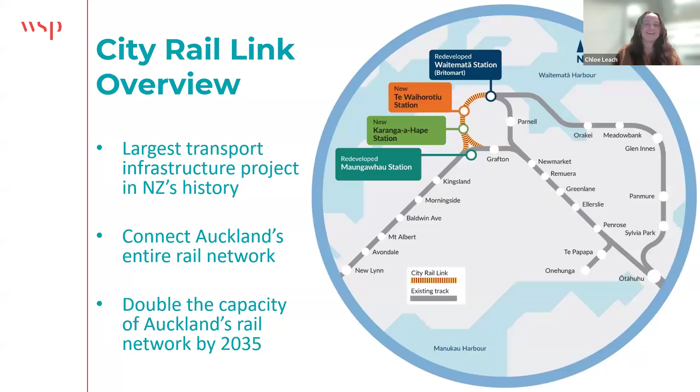Here we have a map of Auckland City where the project is currently taking place. Hey, Chloe. Sorry, do you mind sharing your screen? Oh, is it not sharing? Oh. Is that working? There we go. Thank you. Oh, sorry, guys. My Zoom's been playing up today. So I'll just start this again.

Here we have a map of Auckland City where the project is currently taking place. From Te Waihorotiu Station to Maungawhau Station along the yellow and orange line is the route which the twin tunnels take. In order to construct this, a tunnel boring machine was used. It first travelled from Maungawhau through Karanga-a-Hape and down to Te Waihorotiu, completing its first trip at the end of 2021, before being dismantled and rebuilt to complete the trip again with the final breakthrough at Te Waihorotiu in September of 2022. The tunnel boring machine worked by slowly drilling to excavate and remove the soil in its course before placing segmented concrete rings to line the tunnel as it propelled itself forward.

During my time with the Link Alliance, I worked on Te Waihorotiu Station. Te Waihorotiu is a new 20-metre deep and 370-metre long underground station in Auckland's Midtown. And when CRL is open for public use, it will be Auckland's busiest station due to its central city location. The station will have entrances on Victoria Street and Wellesley Street, providing easy access to key Auckland hotspots like the Sky Tower, Civic Theatre, and Aotea Square. Te Waihorotiu has also been future-proofed for the potential development of a northern line beneath the station.

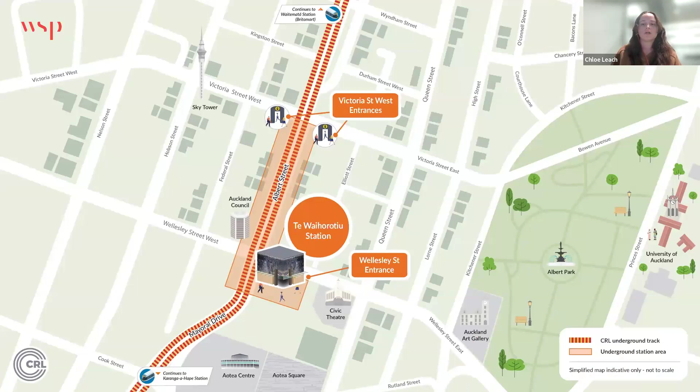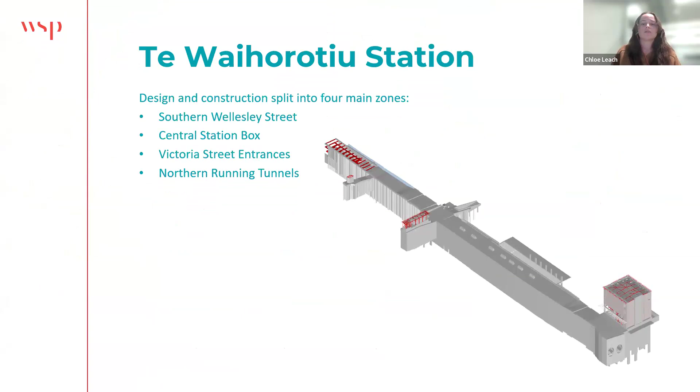The structure is a 4-story reinforced concrete, 2-way moment frame over a 3-story basement substructure. The superstructure has been designed with the capacity to support a future 24-story over-site development building. So we've got some pretty big columns.

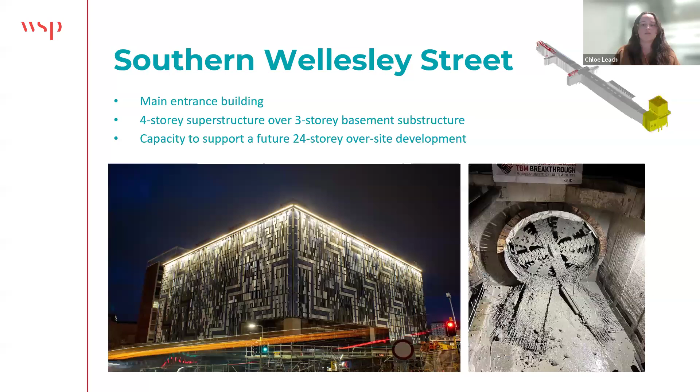Then going down to the substructure of the Southern Wellesley Street zone, this is where the entrance connects to the bored twin tunnels, which link Te Waihorotiu up to Karanga-a-Hape Station. And you can see in the picture on screen the moment the TBM made its final breakthrough into Wellesley Street.

The structure of the central station box comprises of reinforced concrete diaphragm walls that support suspended floor and roof slabs. The station box has 2 floors. The lowest B4 level will contain the train services and platform, and the upper B1 level is the main concourse for the flow of passengers between the entrances.

The construction methodology for the main station box was top-down construction. This involves vertical excavation and installation of diaphragm walls into the soil before constructing and pouring the station box roof on top of the existing soil. The soil below the roof is then excavated out underneath until the required level of the next lowest slab is reached. The slab is then poured and the process continues.

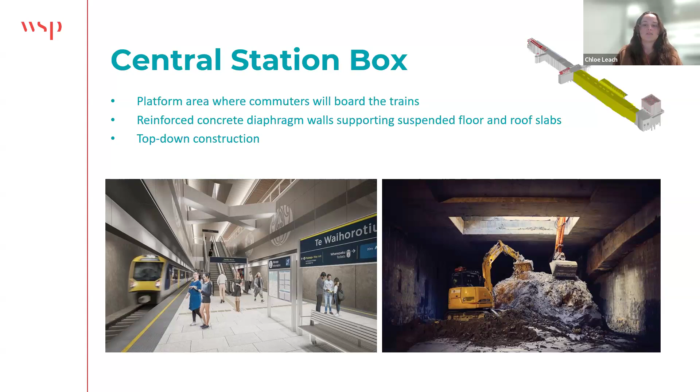And you can see in the photo to the right, the last bit of soil being lifted out of a construction void in the roof before the B1 slab was poured.

Moving further north, we have the Victoria Street zone. This is where we have the second set of entrances to the station, one to the east and one to the west. These will be the main pedestrian access points to the station and will lead passengers to the platform via the central zone's concourse level.

Essentially, the plunge columns are hollow steel columns with shear studs on the exterior, which are driven into the ground at the same time the diaphragm walls are installed. They're filled with concrete during the roof construction and excavated around. After the soil is removed, the concrete cages are placed around the column and an exterior is poured.

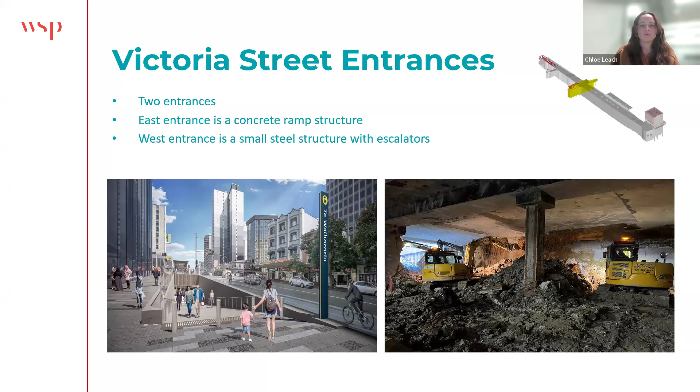Finally, the last zone is the northern running tunnels, which connect Te Waihorotiu Station to the previously completed cut and cover tunnels running beneath Lower Albert Street and down to Waitemata Station. This section of the station was constructed using a different construction methodology known as cut and cover. And this was due to the really tight constraints in this area, meaning that the plant used to excavate for the diaphragm walls couldn't physically fit.

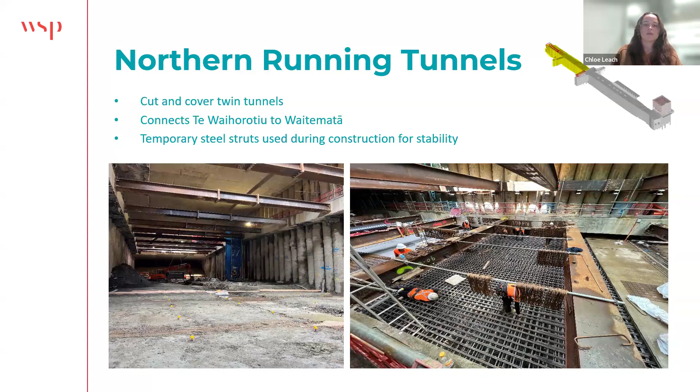Working in the CPS team at Te Waihorotiu Station provided me with first-hand experience in taking designs from plans to reality. Supporting the construction process on site gave me a practical understanding of how our projects are built. Since moving on from CRL and working on other types of structures, I consistently draw on my on-site experiences to make sure my designs are constructible.

The City Rail Link showcases innovative engineering and a collaborative effort reshaping our transport infrastructure and delivering massive value to Auckland. It was a wonderful experience to be part of the team bringing it to life, and I can't wait to see the positive impact it will have on our community. Thanks, everyone.

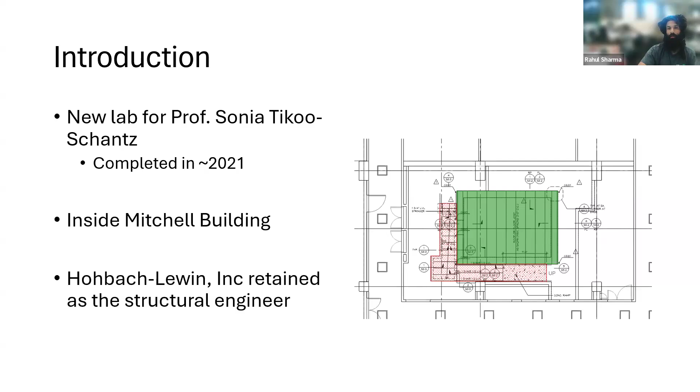So that led to a career in planetary geology and geophysics. And so why is it important to study the magnetic field of rocks? I'll start with the Earth. The Earth generates these magnetic fields through liquid metal flowing through its interior. And what it essentially does is it blocks harmful solar rays from interacting with the Earth's atmosphere and changing its chemical composition. So essentially, it's necessary for habitable life on Earth. Another fun fact is that you can use this magnetic field to understand the tectonic motion of the Earth's tectonic plates. I thought that would be interesting for this group because that relates to earthquakes.

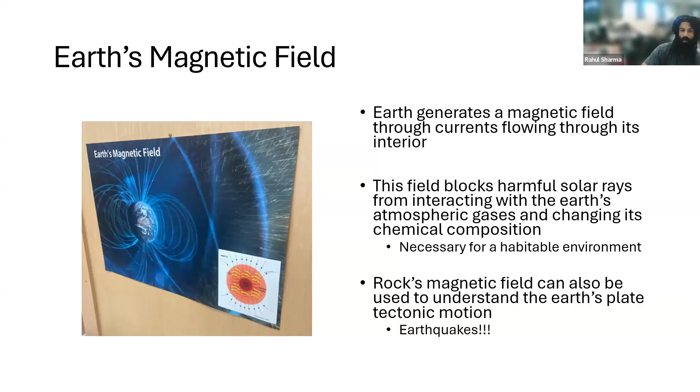Other planets such as Mars have lost their global magnetic field, so that's partly one of the reasons why they're uninhabitable. And it's interesting to understand how these habitable environments form because they generally take billions of years to form.

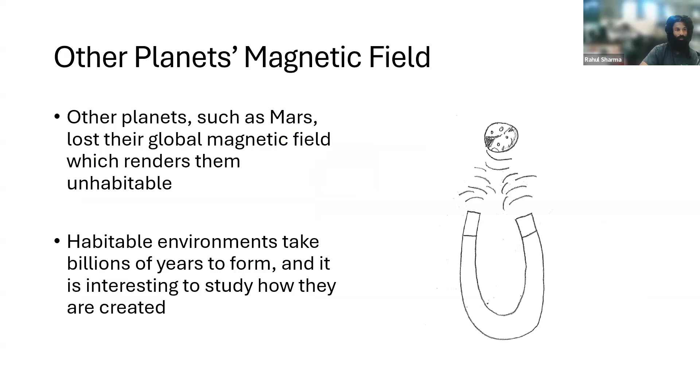This was done through embedding several layers of thin metal sheets into the lab's wall and roof, and then demagnetizing them. There are other labs like this constructed at Harvard and Rutgers, but those are both East Coast schools, and so they didn't have the same seismic criteria. That was one of the challenges - essentially justifying the lateral force resisting system of this particular structure.

This was constructed by this contractor, Lodestar Magnetics. That's who we were working with. They were great to work with. And as far as I know, they're the only ones that construct this type of lab.

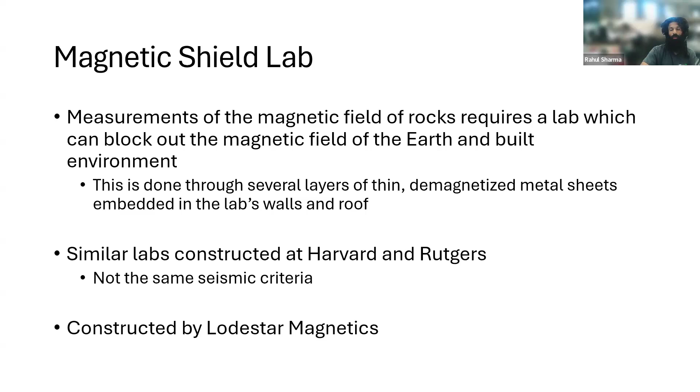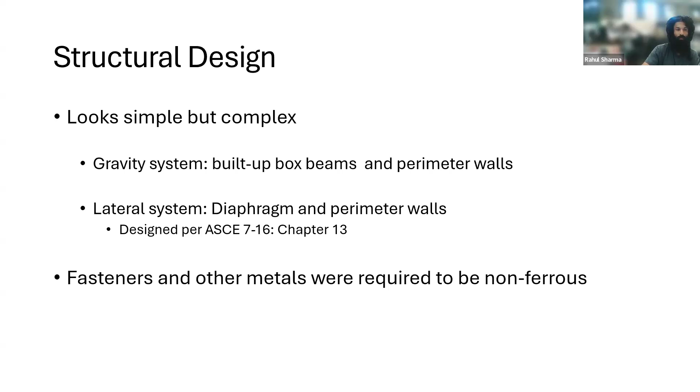Going into the structural design, it looks simple, like a box, but it was actually quite complex. The gravity system consisted of built-up box beams and perimeter atypical walls. The lateral system was wood diaphragms and perimeter walls, designed per ASCE 7, Chapter 13. One interesting and unique fact about this lab was that all the metals and fasteners had to be non-ferrous because we couldn't have anything interfering with the lab's ability to block out the magnetic field of the built environment.

For the non-ferrous fasteners, we had to specify either aluminum nails or stainless steel screws. For the rebar, which was necessary because they had to construct part of the ramp out of concrete, and they also dug into the slab and removed and replaced some of it, they had to use either solid round glass fiber reinforced polymer bars or stainless steel deformed bars. I didn't know those existed - I wouldn't have known without working on this project. So I put the ASTM requirements up there.

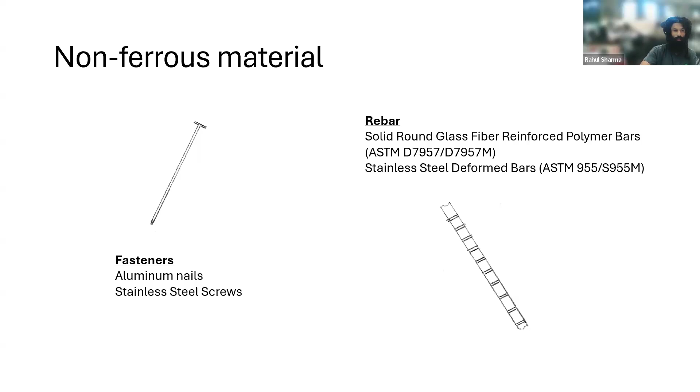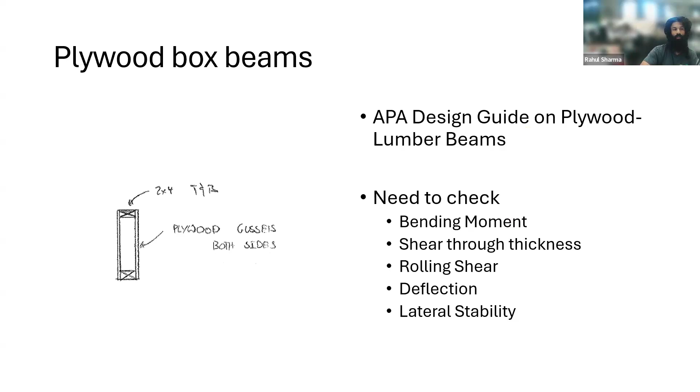As I mentioned, the gravity system consisted of plywood box beams. I also wouldn't have designed these if it wasn't for this type of project. Luckily, there's an APA design guide on how to design these kinds of members, and you have to check a number of different items. Going into the seismic design, I think for most of us who do seismic work, the first thing you have to do is determine the seismic weight.

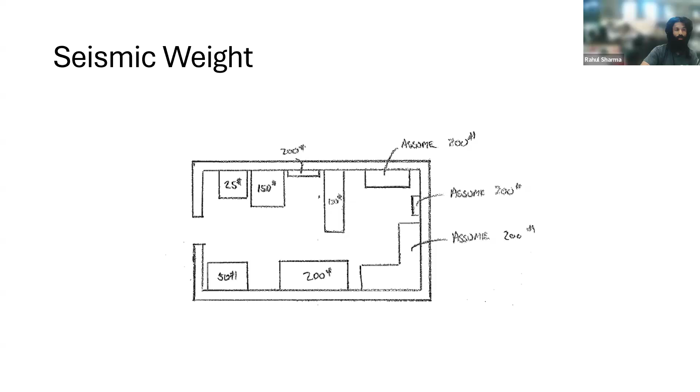We calculated the weight of the material and also the contents inside of it. I have an image here of some of the contents that were in the lab. It's a pretty small lab, but it's packed with quite a bit of stuff.

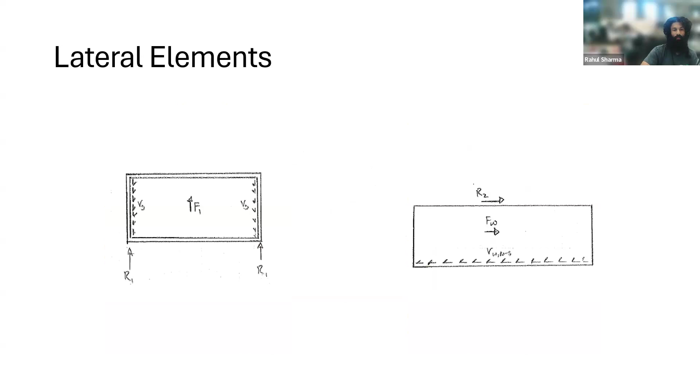Going into the lateral system, essentially following the load path from the diaphragm into the walls, it was important in terms of detailing. As I mentioned, most of the time this lab was constructed it was done in low seismic zones, so we had to ensure there was adequate lateral shear transfer.

Into the lateral elements. Also, because there were layers of metal embedded in the wall, there had to be a very intricate and unique screw pattern, as you can see on the detail on the right, in order to make sure everything was intact together.

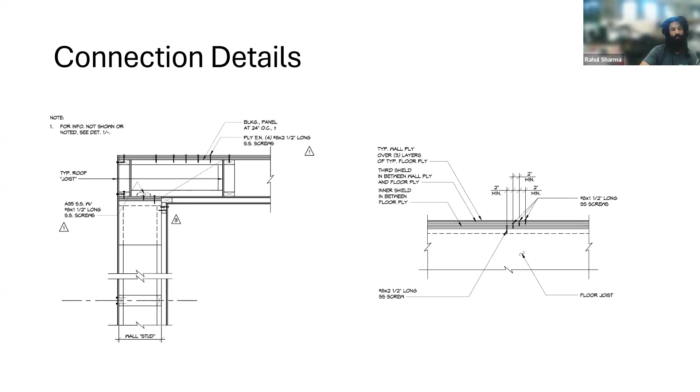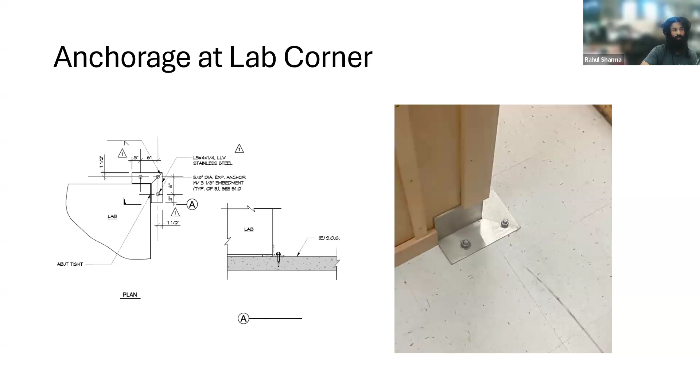That's my summary of the structural design of this structure. So maybe the next question you might ask is what's going on over there now? Professor Tico Sanchez has a student studying a lunar meteorite, a moon rock that broke off the moon and landed on Earth, and she's trying to understand how its impact history affects its magnetization.

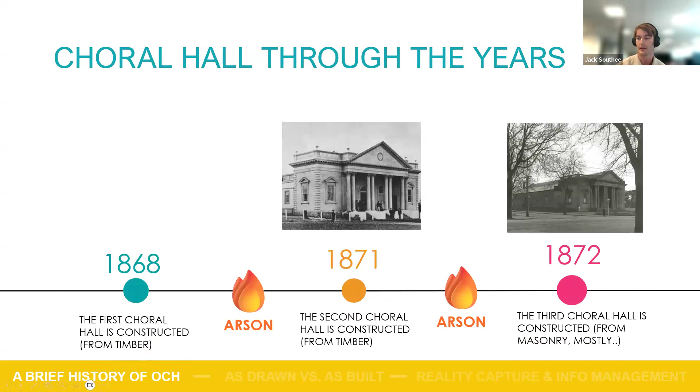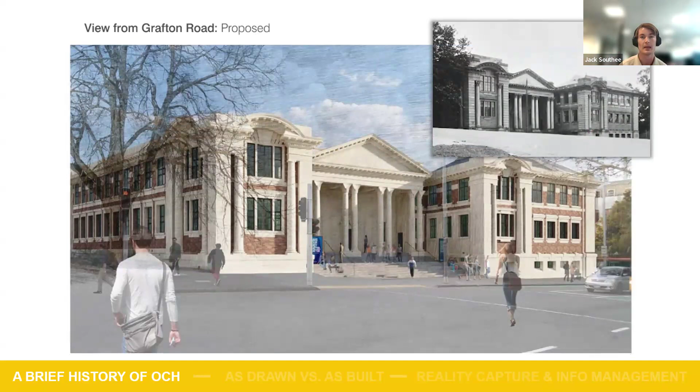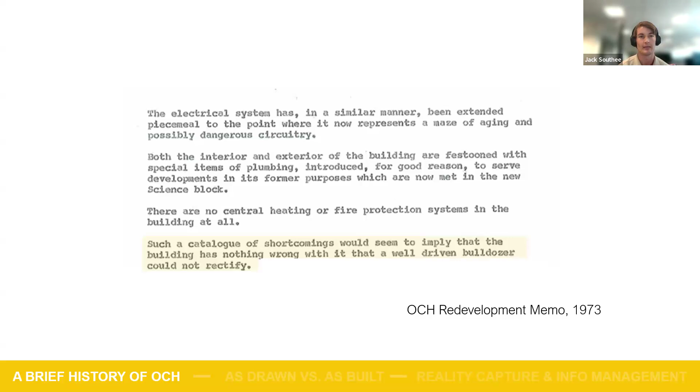So getting onto the dilemma of existing as-drawn and as-built, really what I'm talking about here is site validation. Without dumbing it down too much, when we're drawing an existing structure, we're concerned about where it is, what it is, and how intact it is. Finding out all those things takes time. During design, it's quite hard to get access to buildings - there might be operational restrictions because the building needs to be accessible, there might be asbestos, or there probably is asbestos. So there's only so much you can de-risk on the design side of things.

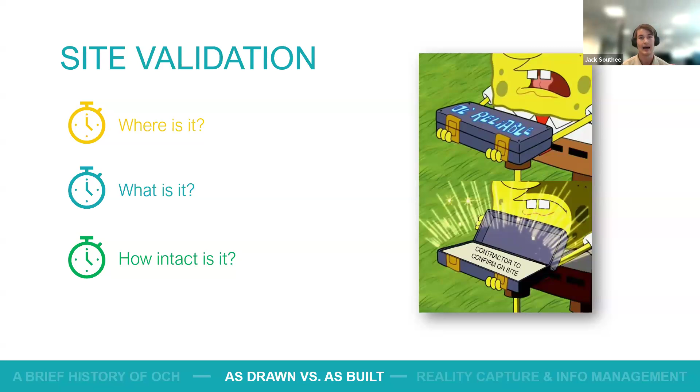So we end up with - and I'm not saying this is the silver bullet - but it is a contractor-to-confirm-on-site or design-team-to-confirm-on-site responsibility. To give an example: anyone who's worked on existing buildings will know that the foundations are always higher than you want them by a lot. As you can see here, we thought our brick foundations were quite a bit lower, but it turns out they're generally just put on the ground.

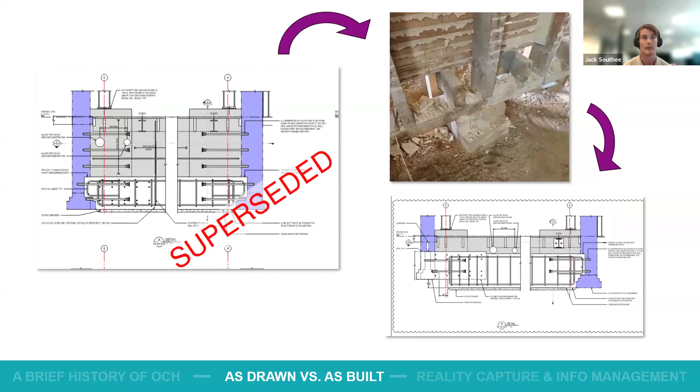So there's a fair amount of relitigation of design involved in that. Floors seem to have all sorts of things underneath them. In this case, once we demolished our existing concrete and timber floor, we found a well underneath it, which is not really something you have on your bingo card, but fortunately we're in the process of being able to celebrate that structure in a pretty cool way. So, blessing and a curse.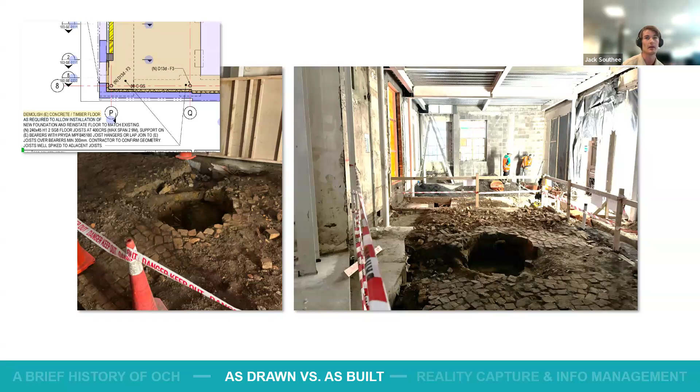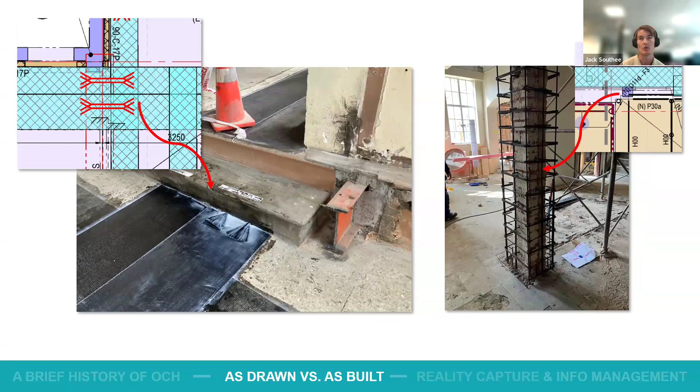But there's also smaller scale things. There's things like where we've got carbon fiber, so we're using a lot of FRP to strengthen our concrete diaphragms. We've then found that that's sometimes in the way of our strands or columns that are just smaller than we want them to be, things that are kind of bitsy and hard to track. This one I've also just thrown in there, another condition thing. Piles back in the 1870s were a little bit different to how we'd have them now.

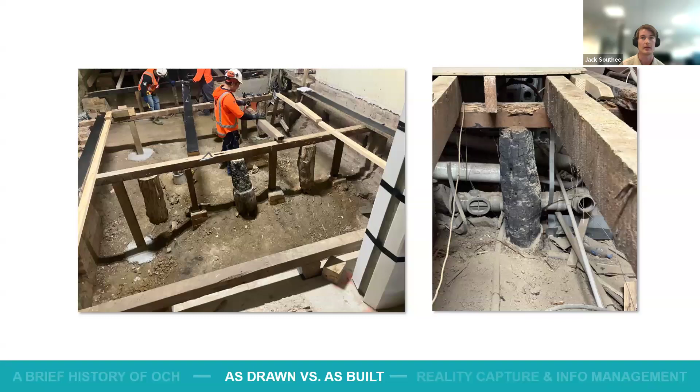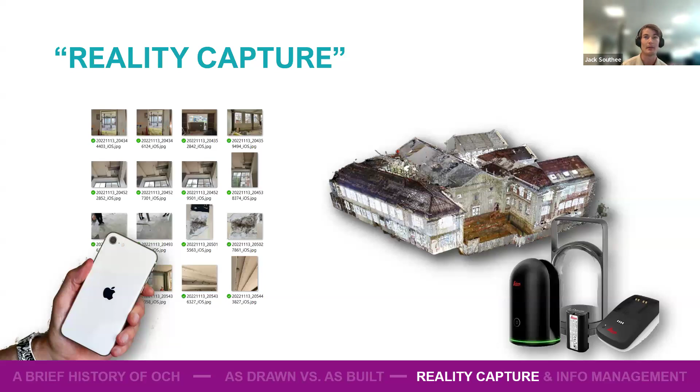So a lot of things that are all over the place, which is where I lead into this reality capture and information management piece. Reality capture, when we're talking about that, is anything from taking photos on your phone through to taking a big 3D model of a building, which is actually what we ended up doing in this instance. So it's not a typical one.

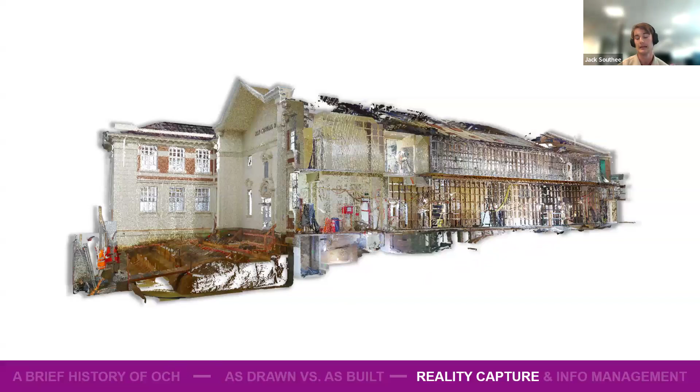Here's a section that was cut through. It's not a cadastral survey in the survey sense where you'd actually build off this. This was me walking around with a Leica BLK scanner, which we have access to here at Beca, doing my best to build a model. As you can see, just looking through this section, it immediately makes it a whole lot nicer to see where our levels are and what's sitting on top of the other. There's some other nice renders here showing what that looks like, and being able to digest the structure in a much more palatable format, which is cool.

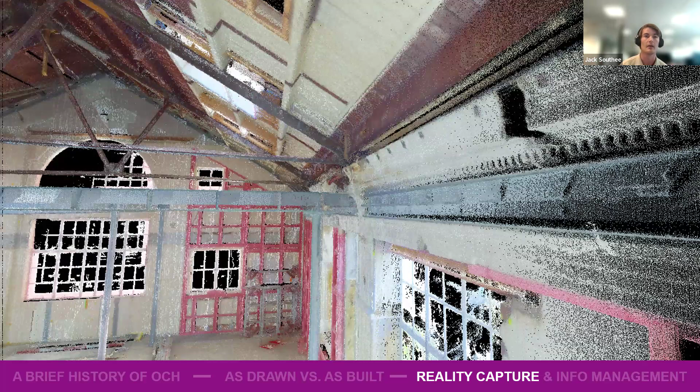The other thing is we can do successive scans. In this case, you're seeing this lovely bit of entablature, as it's called, which we didn't expect to be there on the side, which is always fun. So we ended up rearranging the steel work to be sympathetic towards that. It's cool to see how that progresses.

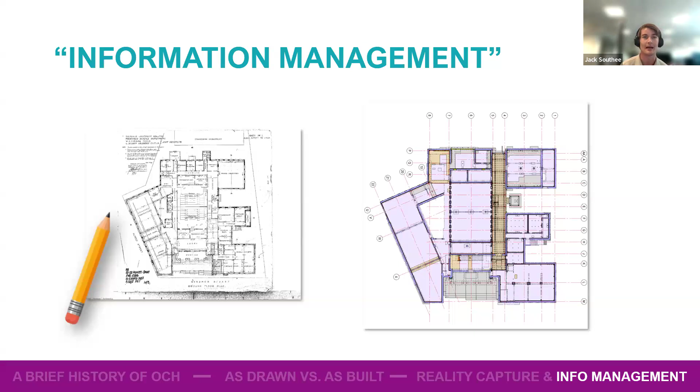Now looking at information management. Information management is really just the way that we communicate information, and it's anything as basic as drawings, which obviously have come a long way over the past 100 years, through to folder structures, which seem to, over the past few years, not have gone that far, other than now being a bit cloud-based.

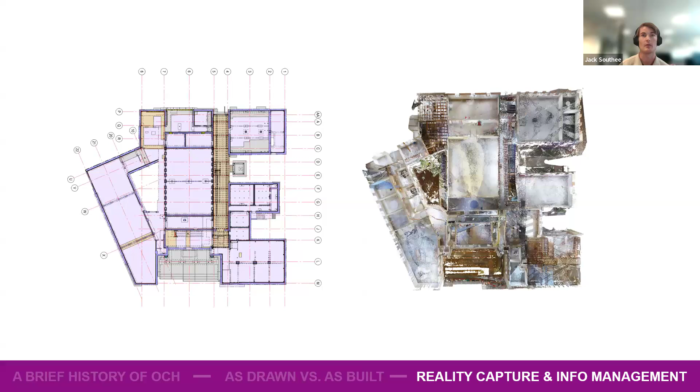So how do we combine the two of them? Well, really, to get the most out of something like a point cloud scan, it needs to be in a format that's actually shareable and accessible. Same with drawings and things like that. One thing we found really beneficial on site was leveraging cloud-based drawings. We've been using Autodesk Construction Cloud Build, which lets us have a live view of the drawings with hyperlinks to our scans and photos and bits and pieces on it, which has proved incredibly beneficial.

We can also then put the scans that I was talking about on this platform. Generally 3D scans and bits and pieces like that have monstrous file types, and you need five different programs to be able to open and process them. Being able to have it on a web-based platform and sharing that not just with us but with the architects and the contractors has really helped to expedite some of the back and forth that's otherwise required when reassessing designs when we find that the existing structure isn't as we want.

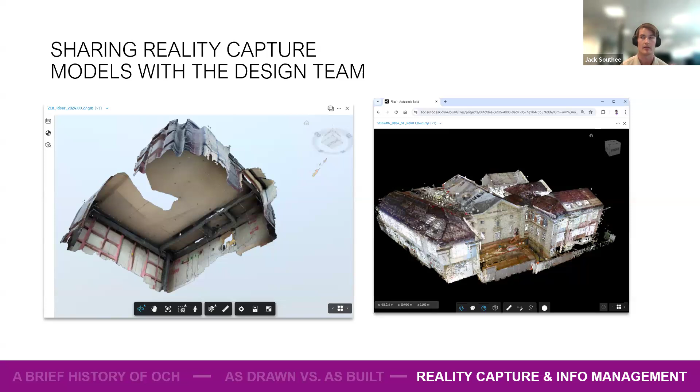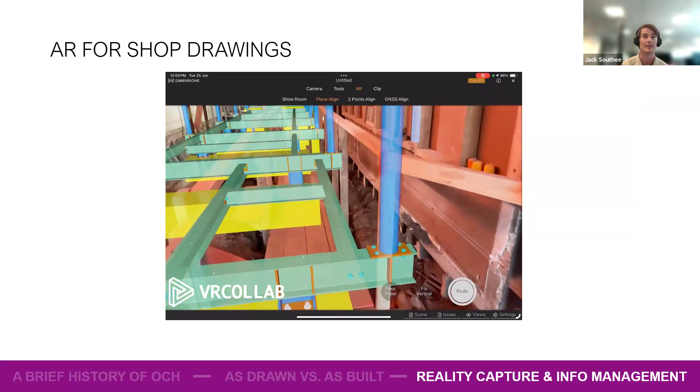And then another element of that is, I guess, augmenting structures onto reality. It's another step beyond that, where we've found that taking shop drawings and putting them into the real space makes it a lot easier to - and it's not a perfect science by any stretch - but it allows us to de-risk a little bit further where we may or may not see clashes.

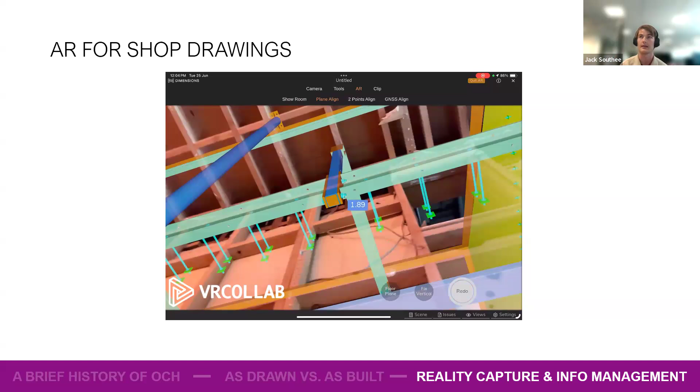So the big lesson there really, I guess, is that no amount of intrusive investigation will eliminate the risk of unknowns. You can do your best, but by the time you're digging up foundations and all the rest of it, there will be discoveries on site. So to deal with that, having a shared platform for accessing and collaborating on your drawings, your documentation, and your models and the like is really critical when you're on site, and time is a bit more important than it might be when you're back in the design office.

I would encourage you all to look at different ways of recording site observations and engaging with reality capture. It's not just normal photos—360 photos, videos, photogrammetry, and LiDAR scans have all been really valuable for us. The big value out of all of that is that we can coordinate between us and the contractors, breaking down a lot of the communication issues that would otherwise potentially fail if we're not working off the same drawings and looking at the same models. So that's it from me.

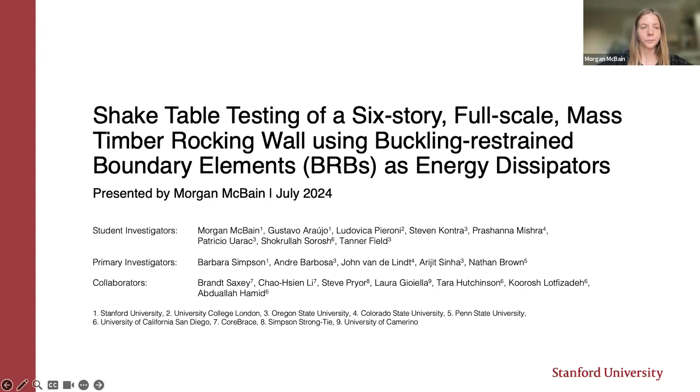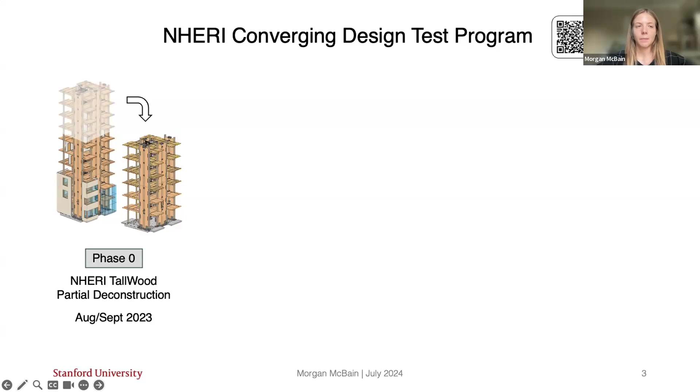This work is part of a broader NHERI Converging Design Test Program. I have a QR code linked here if you want to look at our website more, but the program overall has focused on testing resilient lateral systems for mass timber structures. We started first with deconstruction of the top 4 stories of the NHERI TallWood project. The Tallwood team had tested a 10-story building, and we took off the top 4 stories to leave us with a 6-story test specimen.

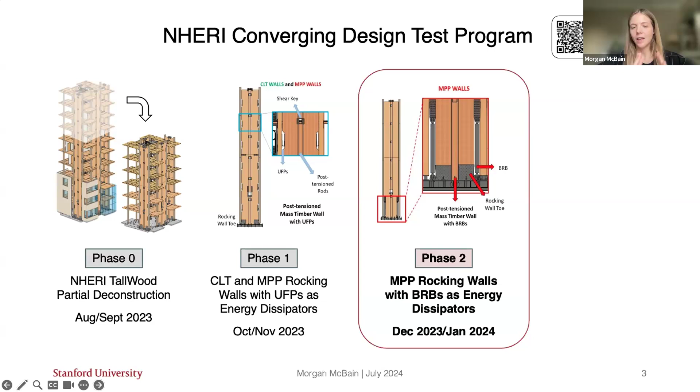We first tested mass timber rocking walls with U-shaped flexural plates as energy dissipators, then swapped out the lateral system for our second phase of testing, looking at mass timber rocking walls with buckling restrained boundary elements—the same as buckling restrained braces, just placed vertically in this case—using those as energy dissipators. That's what my work has focused on and what I'll be talking about today. Our third phase of testing worked on a resilient steel frame developed by Simpson Strong-Tie.

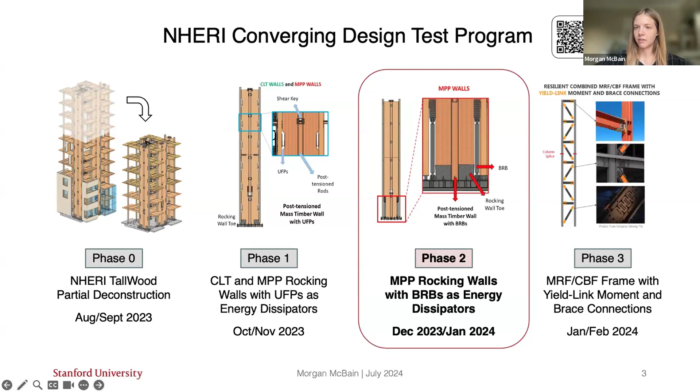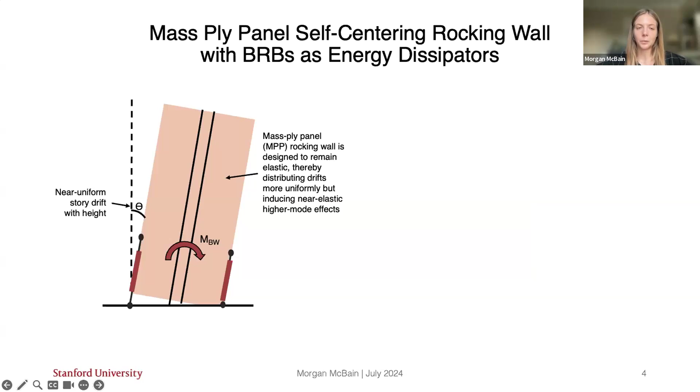Now I want to break down what this mass timber rocking wall is. We start with a mass ply panel, a mass timber product consisting of layers of plywood laminated together. That wall is designed to remain elastic up to the highest considered levels of shaking, and that elastic stiff wall distributes drifts more uniformly along the height of the building, spanning the whole height of the structure. But that even distribution of drift does come with near elastic higher mode effects that can be induced.

We then add post-tensioning rods, which also span the full height of the building and are designed to remain elastic at the highest levels of shaking. Those are in place to limit the post-earthquake residual drifts—they recenter the structure after shaking. We also include buckling-restrained boundary elements at the base to resist the overturning moment and dissipate energy in the system. What allows us to rock is the uplift mechanism: the wall itself is not directly connected to the base, so we're able to have uplift and rocking, which results in some compression of the wall toe, but overall does not damage the wall.

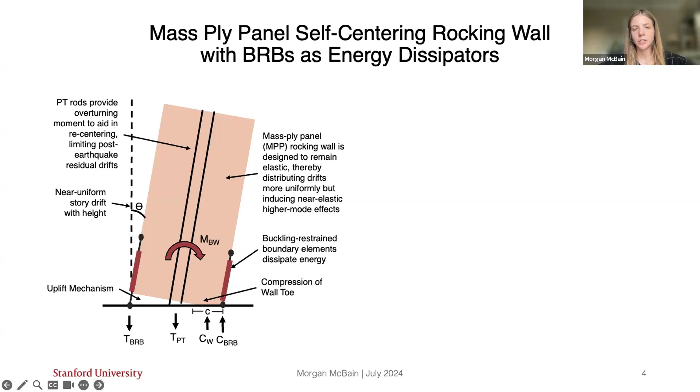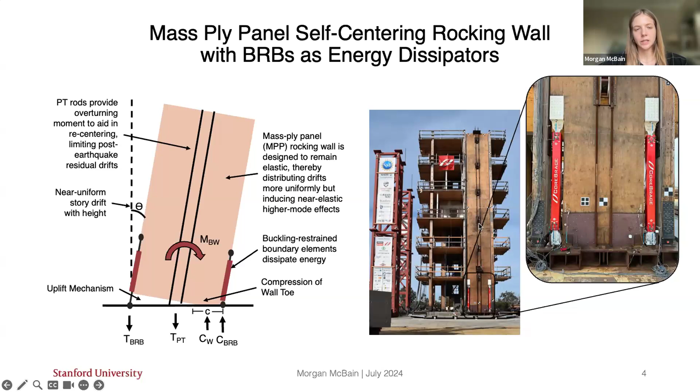This is that wall in the test specimen at the shake table site at the University of California San Diego. If we look at the base of the wall again, you can see the post-tensioning rods that run all the way up the height of the building, as well as the BRBs. With this test, we really wanted to focus on key performance properties: limitation of the post-earthquake residual drifts, a near uniform story drift distribution, and any near elastic higher mode effects that might be induced.

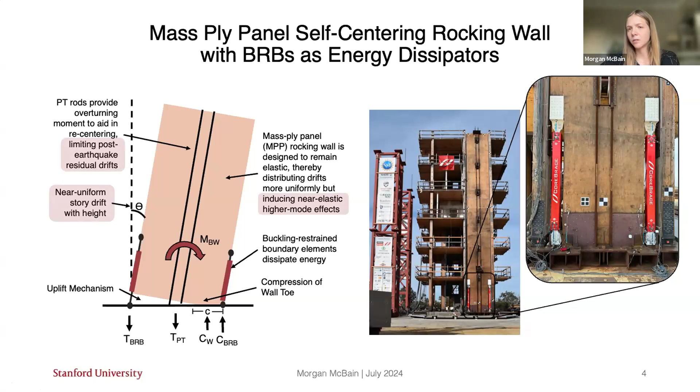So to target those items, we conducted a test program where we ran 23 tests. They ranged from 0.1 to 1.1 MCER intensity for a hypothetical Seattle site. And we chose Northridge, Niigata, Ferndale, and Maule records to be representative of 3 different source types: crustal, intraslab, and interface. And then you can see on this plot on the right that we scaled them to match the design MCER response spectra, especially focusing on matching the first mode period and the second and third higher mode periods as well.

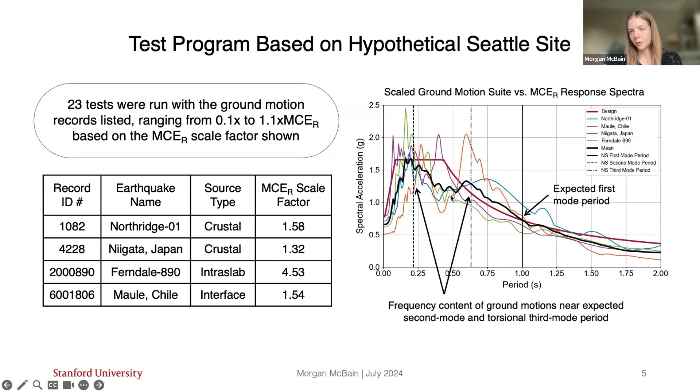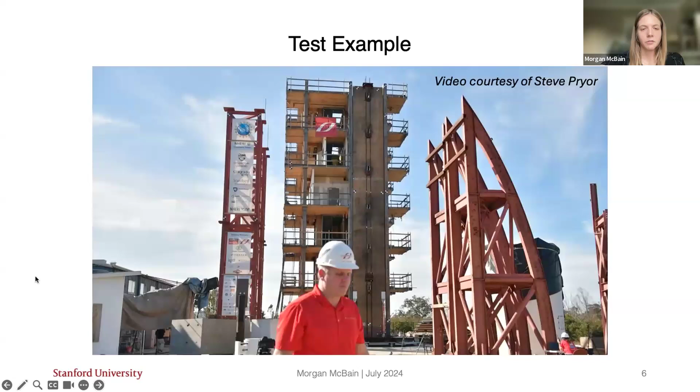And this video shows one of those 23 tests. It won't let the whole thing play, but just so you get an idea of what we're looking at, this is a 100% MCE intensity for the Northridge ground motion. So you'll see as it starts, the shake table at the base of the building is moving. And then we start to see the uplift of the rocking wall in the somewhat linear displacement profile that we're looking for.

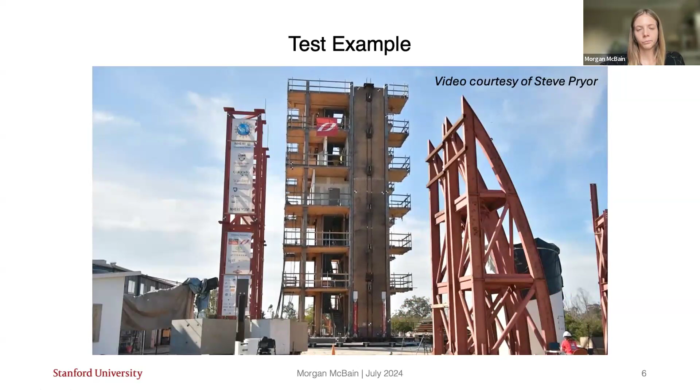And when we test it, so on that building that was shaking, we had right around 600 active sensors. Those are accelerometers, displacement transducers, and some different strain gauges as well. And so from that, I'm going to show just the global responses of the structure that we've looked at so far, starting with the peak relative floor displacements here. So what this plot is showing along the x-axis, we have each test, and then this is the maximum peak relative floor displacement relative to the ground that we're observing in each test.

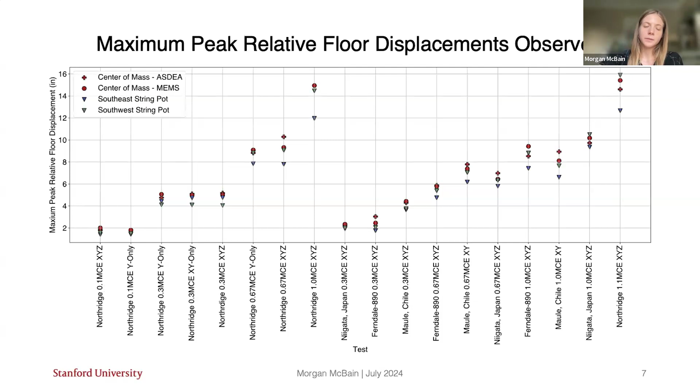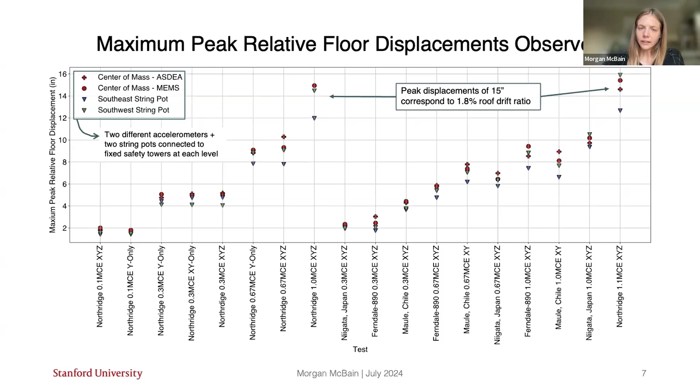And I'm pulling this from 2 different accelerometers that were at the center of mass at each level, as well as string pots that were connected to the fixed safety towers besides the building. And so what you can see here, we're getting at our highest intensities of shaking, roughly 15 inches of roof displacement. That corresponds to a 1.8% roof drift ratio for this building.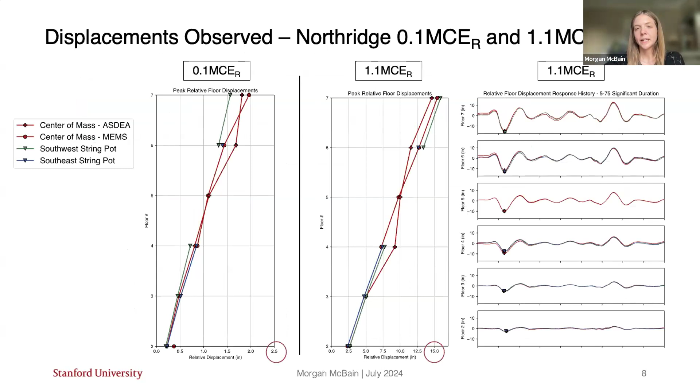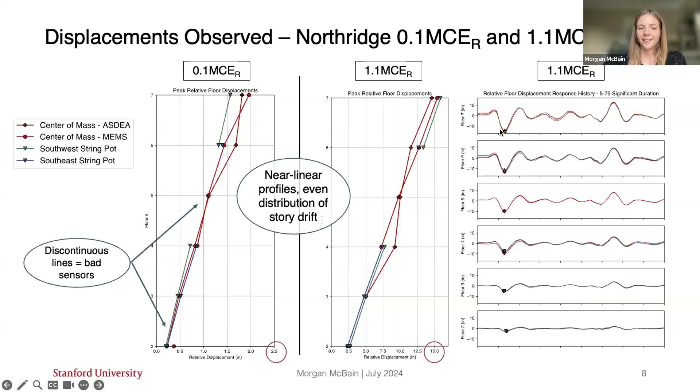And then if we want to take a look more at what's behind that maximum response plot, we can see here for the 0.1 MCE and 1.1 MCE intensities for the Northridge ground motion. We do get near linear profiles, and that corresponds to the somewhat even distribution of story drift that we are expecting. You'll see a couple of the discontinuous lines here. Those are just due to bad sensors. So it's where we are missing some data, but overall, really happy with these results.

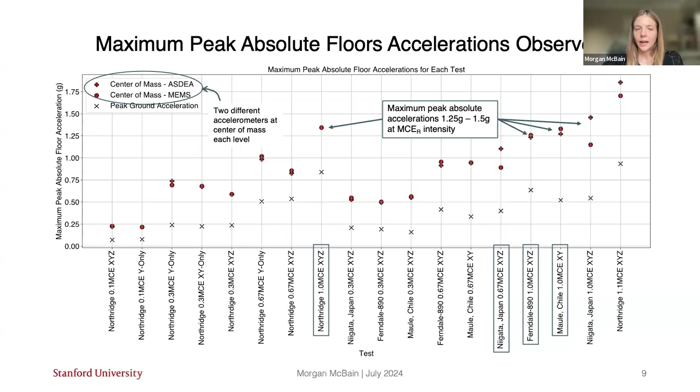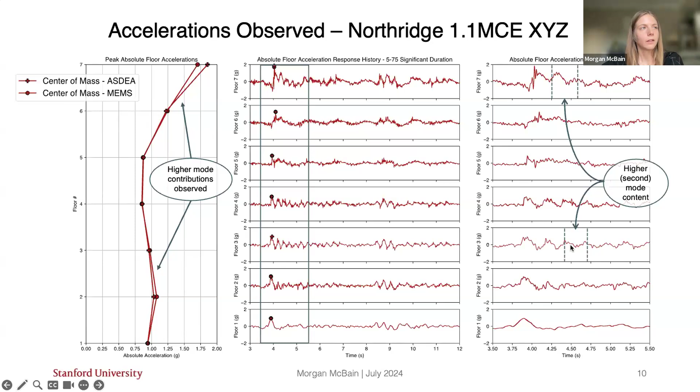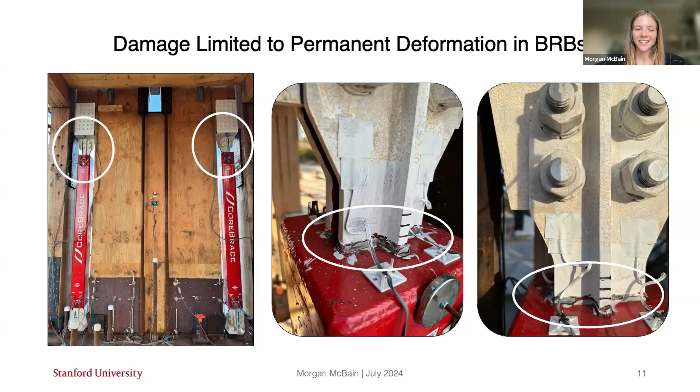In addition to the sensor measurements, we were conducting damage observations throughout the testing program, especially after large shakes. And what we saw was that permanent damage in the structural system was limited to deformation in the BRBs, which was what we expected. So we get about a ½ inch of permanent elongation at the end of testing, but the rest of the structural system wasn't damaged, remained fully intact, which is good. When we're thinking about functional recovery after events, it would be pretty easy to reoccupy quickly.

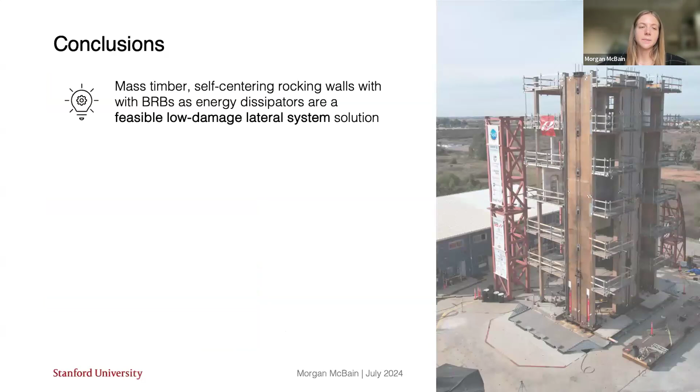So with that, I just want to look at a couple key conclusions. First, this test has shown that the mass timber self-centering rocking walls with BRBs as energy dissipators are a feasible low damage lateral system solution. We saw near linear floor displacement distributions, which were paired with the near elastic higher mode effects. But overall, the structural damage was limited to the permanent deformation in the BRBs, and the structure was able to self-center with the PT rods resisting any yielding.

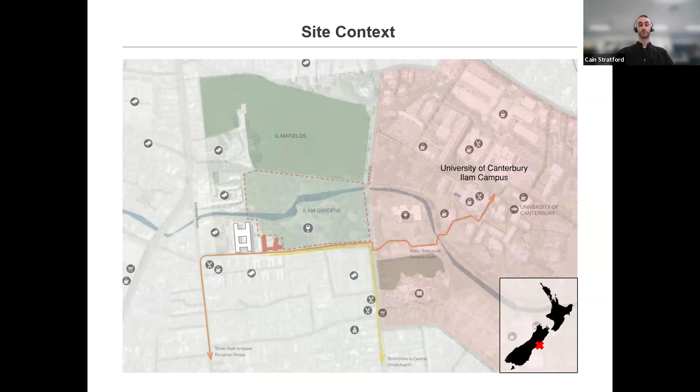So the University of Canterbury's main campus is situated in the Christchurch suburb of Ilam. And for those who are international listeners, I've provided a small map on the bottom right just to show where we are in context of New Zealand. So the university has experienced a significant rise in demand for on-site student accommodation in recent years. So to meet these growing demands and future-proof the campus for further growth, they've been focusing their efforts on development of new building stock that can supplement their existing accommodation halls.

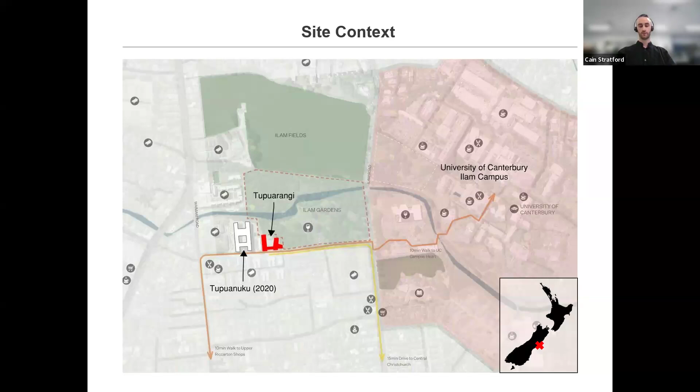So the proposed site for Tupuarangi is located a short 10-minute walk from the main campus and is bordered on the north and east by the heritage boundary of Ilam Gardens. So it's a pretty quiet and peaceful setting for accommodation. Directly to the west of the site is a 5-story Tupuanuku Hall of Residence that was recently constructed in 2020, of which Aurecon were also the structural designers.

The building configuration consists of 3 seismically separate structures, including a west tower, which is 8 stories tall and fairly regular in shape, an east tower, which is 7 stories tall and characterized by a 17-degree kink in plan, and connecting the 2 towers is a 7-story central link building. So overall, the facility will be able to cater for a total of 283 students throughout the academic year, of which 270 of these are typical bedrooms, and the remaining 13 are accessible bedrooms, which are spread throughout the building.

A rather unique aspect of this facility is that each student gets their own ensuite bathroom, which come in the form of pods that are prefabricated and then lifted into the structure. In terms of functionality, the ground floor of the West Tower is the primary open plan area of the building, with a kitchen, a dining and social space, and several shared student areas, while the ground floor of the Eastern Tower is primarily used for bedrooms and a study area in the single-story extension. As we go up to typical floors, the building use is dominated by bedrooms, except for a shared lounge space on each floor of the central link.

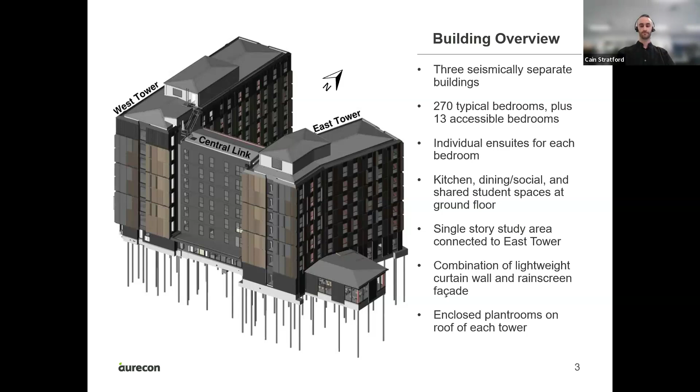The facade system is generally a lightweight curtain wall, however the central link does have some areas of timber infill rain screening. And we do have 2 enclosed plant rooms that are located on the roof of the towers that house air handling units. Now looking at the structure itself, the gravity system is consistent throughout all 3 of the buildings and consists of structural steel framing supporting precast flat slab flooring units with a cast in situ topping slab. So this type of flooring system was selected for its inherent fire resistance, acoustic performance and vibration properties, as well as being easy to erect.

2 unique aspects of the gravity system are a 2.5 meter cantilever portion of the structure on the southern end of the West Tower. And we also have a few fairly significant transfer beams at the first suspended floor of the West Tower, which were introduced to reduce the number of ground floor columns and create an open plan feel that the architect required.

The lateral load resisting system for the building is a combination of D-braced eccentrically braced frames, or EBFs, and steel moment resisting frames. These systems were designed just using an equivalent static approach. However, the response was further verified using a response spectrum analysis and in some cases a nonlinear pushover analysis. So both the west and east towers utilize EBFs in the transverse or short direction, which have been configured as regular as possible throughout the length of the towers, while still satisfying architectural constraints.

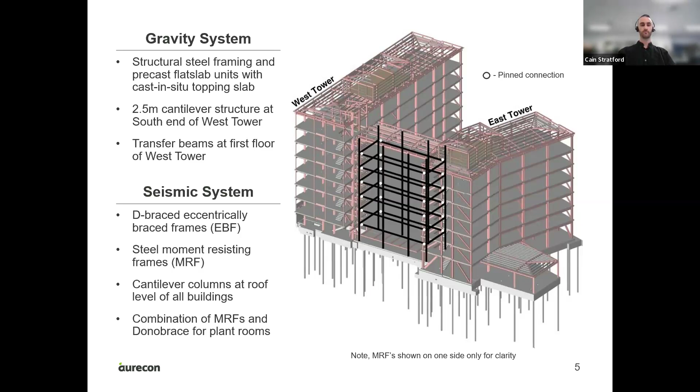Now the buildings are founded on a grillage of reinforced concrete ground beams on unimproved ground and around 96 screw piles that extend up to 23 meters to the underlying Riccarton gravels. All elements of the foundation system have been capacity designed to resist the full overstrength demands from the superstructure. The screw piles do support significant compression and uplift demands in the east-west direction, as the building height to width ratio is relatively large, and they also help control building settlements under serviceability loads.

So beneath the D-braced EBFs, larger ground beams are used to distribute the big push-pull demands from internal columns out to the grouped piles at each end of the ground beam. This has the benefit of providing a larger lever arm to control building deflections and also utilizes the piles in a more efficient manner.

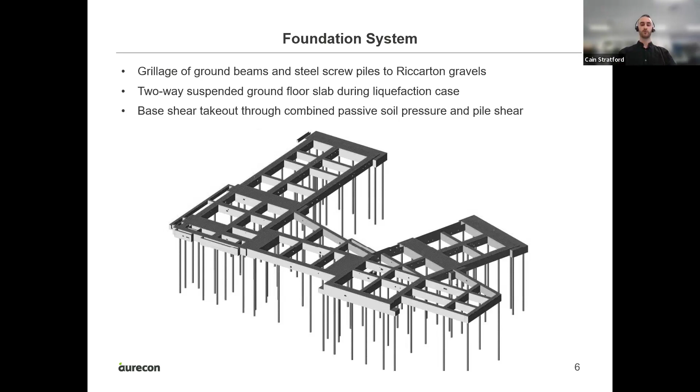So the ground floor slab is tied into the supporting ground beams to act as a diaphragm between brace bays in the east-west direction, and is also designed as a two-way suspended slab between screw piles in the event of settlement during liquefaction. And finally, the base shear takeout is achieved through a combination of shear in the screw piles and passive earth pressure on the face of the ground beams.

As we come to the end of the presentation, I'd like to briefly acknowledge the other members of the design and build team. The University of Canterbury and Cedar Pacific as the ultimate and end client, respectively. Southbase is the general contractor, and Jasmax as the architects. Here at Aurecon, we've been undertaking the structural, civil, and seismic restraint design. And lastly, ENGEO, GHD, and Powell Fenwick as the design consultants for geotech, fire, and building services.

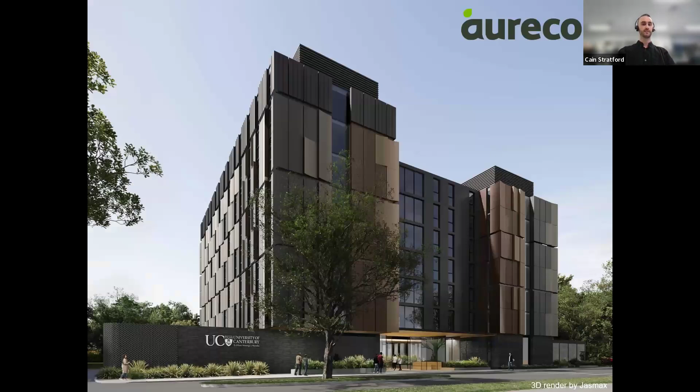Awesome. Thanks, Cain. I guess now we'll move into Q&A. If I could ask all the presenters to turn their screens back on. So I guess first I'll pose a question to Chloe. For the CRL project, what do you think your biggest challenge was throughout the project?

Yeah, I'd say the biggest challenge I found was definitely the tight time frame we had for getting sections of construction done. Because CRL is an alliance, it wasn't just the construction team that were responsible for getting everything built, it was all of us. So we really had to work hard to collaborate, and when there were issues on site or value engineering that needed to be done, it was all of us working together to get things pushed through by the dates that it needed to happen. So yeah, I'd say that was the biggest challenge.

Awesome. Thanks, Chloe. Just a reminder to everyone watching, feel free to submit your questions down below. Looks like we've got one from Danny. Question for Jack: when setting up the 3D model scans, did it require a lot of technical assistance or investment? Would it be feasible for a grad to start that and initiate it themselves?